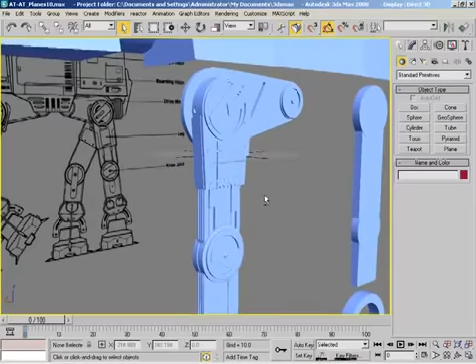So, where are we going to pick up at? Well, there's a couple of things. First off, I'm going to move this little slot that we carved in here. I got a message from one of our users who told me that this is actually a slot to help this little piece of armor move properly, and I was like, okay, because it's real easy to move, I can just do that. And that's done.

Next thing, I wanted to work on the Transdrive, I think that's what we've been calling it repeatedly over these videos, and that's this funny flashlight-shaped thing that's up in between the legs that kind of keeps the legs moving. The legs are actually attached to this thing.

Let's see if I can find it. We'll dig through and take a look at a few pictures. This model doesn't show us too much, but you can see that it's there, all the time. But you'll find as you dig through at least the reference imagery that we have, that we don't have a ton of information as to what this looks like. So some of it we're just going to be making up.

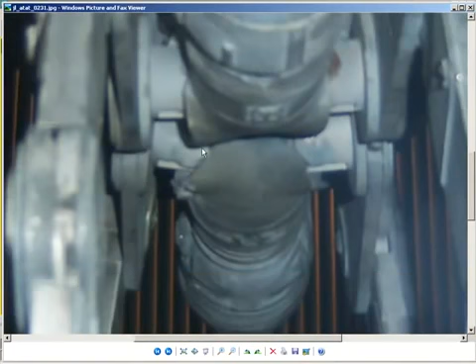So, okay, here's the actual studio model, and this is a pretty good shot, but we're looking kind of down the thing. So it's two separate pieces, kind of T-shaped, cylinder, yeah, T-shaped. Okay, and the T's that come out attached to those plates you made. Yeah, and the funny thing here is we get almost the only piece on the whole thing that's kind of organically shaped, because we got this nice flowy T curve that's all rounded here and rounded there. And that's where I'm going to start, and we'll work forward and we'll work back from there.

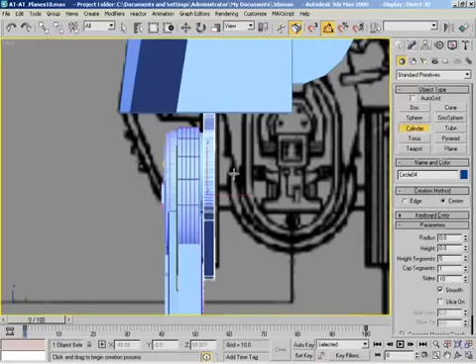So let's begin, I'm going to create a cylinder. Let's see, what are my views? Here's the front view, front view is good. Or maybe I want a real front view, which is actually the back view, don't ask. So let's go ahead and just create a little cylinder.

The size is, I'm not actually going to use the size of my image plane at all, for a couple of reasons. One, if we go to the outer edge of the drawing, you'll notice we have almost no room in between there and our plate, and if we take a look at pictures, there's a little bit of room there. So I'll be kind of fudging that around a little bit. But the other thing, let me get out of here and we'll pull back on the radius from here, is that I'm going to start working at the back and work my way forward. And this little piece, if we come back here, you can just kind of tell is going to have to be a little smaller. The whole thing kind of tapers down as it works its way to this little T-junction.

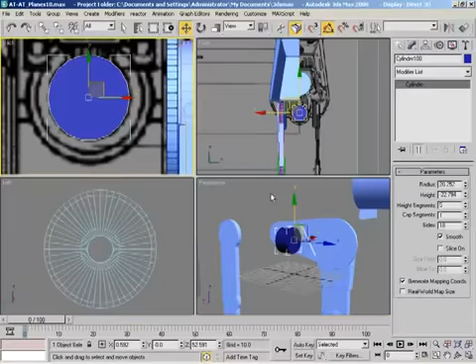So that's where we will begin. Let's jump back over here to perspective. Now, this is something that needs to be rounded and smooth and very organic. And whenever you're modeling something like that, try to keep things as simple as you possibly can.

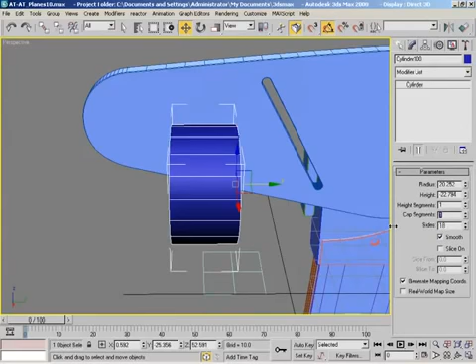So let's hit F4 so we can see edges. I'm going to right-click and kill our height segments. Let's take our sides, I'm going to set this to, not 18, I just want to set it to 8. Oh, your number lock is off. I love that. Okay, now let's convert this over to an editable poly.

And I'll just grab, I want something, it doesn't really matter which one I get. Let's get vertices. And I'm going to rotate this so that I get a flat top on the top and a flat side. Okay, and on an 8-sided object, that means rotating it down its central axis, in this case Y.

Let's go ahead and get the rotate tool out. By 22.5 degrees, which is 360 divided by 2 divided by 8. And that's how you end up with that. So that's not like a magic number, you can actually do math and figure that out.

I know, scary. So let's pull these guys back just a little bit. We're going to end up turbo smoothing this, obviously. So here's what we're going to do for starters: I'm going to create a bend in this that just goes off to the right. Now, to do this, I'm going to get a little fancy.

Of course, you could extrude along a spline. I just don't want to have to build a spline. Maybe I'm lazy, I don't know. I'm going to grab this guy. Notice I deleted a polygon here.

We'll shift drag this out, and then I'm going to shift drag it out again. We'll hit 4 to go to polygons. I'm going to delete out this little bridging polygon. Let's go to edges, and I'll pull this guy in real nice and tight. Just maybe some right in there.

I'm a little picky. Now, let's hit 3 to grab borders, and we'll cap this back. All I wanted to do was create a little floating polygon there. Let's hit 4, grab this face.

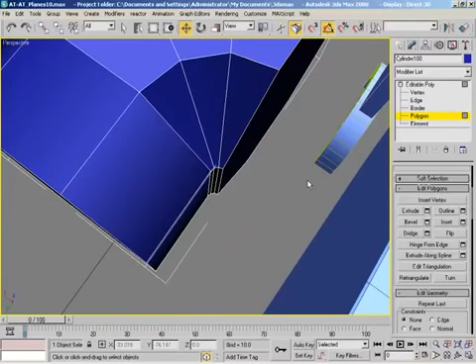So there we go, we're rotating off to the side. We can now hit 4, grab this polygon and remove it, we don't need it anymore. Let's do a couple other things too. Let's grab this polygon, I'm just going to shorten this whole thing up just a little more than it was.

I'm going to extrude. So where's my extrude? There it is. So a little bit of extrude, and this is just to kind of stabilize our smoothing so it doesn't get overly smooth right there. And let's extrude out here just a little bit as well. We got other operations we'll be performing on that in due time.

But let's start off by taking a look at what this will look like when turbo smoothed. Bink. And I like looking at just ISO lines. It's, of course, nicer. And let's go ahead and kick up the number of iterations, and I'll hit F4. So there we go, it's twisting off to the side, but of course we need this to T.

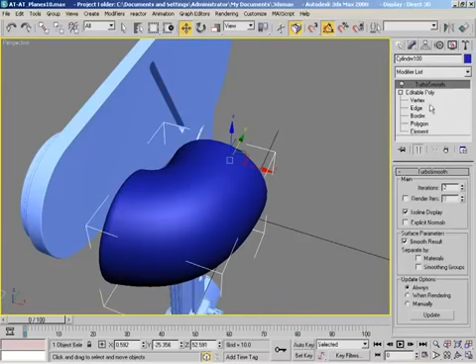It needs to go in both directions. So let's go down to the editable poly level, and in between the editable poly and the turbo smooth, we'll drop on a symmetry. There we go. Now that already gives us a shape very similar to what it is we're looking for.

But I have a personal problem with it, in that we get this kind of flattening right up here on top. And that's not like a major thing, you could probably just completely overlook it if you wanted to. I don't think it would be the end of the world. But if you wanted to kill it, it's not that hard.

What I would do is go right after the symmetry, and let's drop on an edit poly modifier. And we'll come over to edges. Let me press F4 so that we can see edges again. And let's turn off the turbo smooth temporarily.

I'm going to get this edge. Let's just go ahead and loop it, make my life a little easier, and then we'll deselect what we don't want. We don't really need to delete those because we can leave those as two 5-sided faces, we don't need to delete that. You could if you really wanted to clean out the crease right there, but we won't. And we'll leave that guy.

So once we have all these selected, let's scroll down here. I'm going to hold down Control and click Remove. Now double check and make sure that got rid of your vertices. And it did. So now let's take a look with the turbo smooth back on.

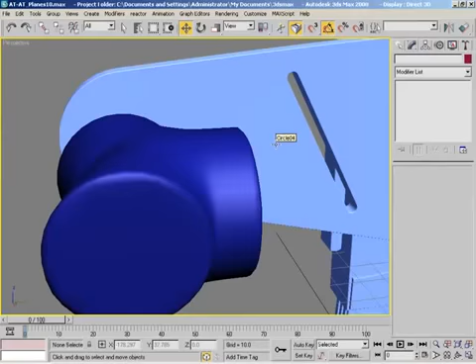And of course, your rounding back. Yeah, get there. And so now everything is all nice and rounded out, nice. And it tees off in both directions. So that's awesome, because now we can just model on one side, and everything will just kind of come along for the ride.

Okay, so we don't have a ton of information here, but we can see that this is going to extrude out. There's going to be like a cylinder that fits into plate. Slot A goes into slot B, and so on.

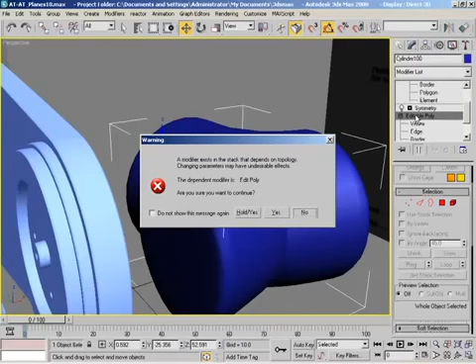So what I'm going to do is make some room first off. Let's do all this at the edit poly level. If we go down to the editable poly, we'll get this warning, and we really don't want to change our topology at this level because we can cause problems. So let's just click no, and we can do anything we want here at edit poly - except for the symmetry, huh?

All right, hang on. Let's just go ahead and throw this away. We'll do him in a minute, we'll redo that one. So we'll toss that, at least you see which direction we're going. So now let's go down to the editable poly, and let's go to polygons. That's what I get from making all this stuff up as I go. And let's inset this - maybe just a little more.

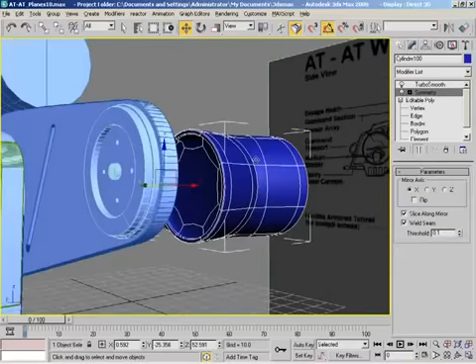That's okay, wait a minute. Hang on, is that creased right there and nowhere else? Yeah, you didn't see what happened? It didn't select the loop in there. That's fantastic, I'll just hit undo, and then we'll go back in there and fix that. No, I didn't notice at all.

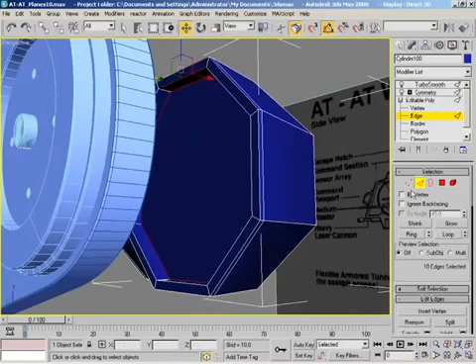So let's hit 4, and then hold down Control, and click on edges. So we'll start with that. I'll press F4 so we can verify. Now we'll click U, then Loop, and that should give everything I want. So yay, now we'll chamfer, and that's fine. So now if we take a look at our end result, that's what we should have, and that's much nicer. And we get that on both sides, so that's excellent.

I wouldn't mind tightening this up a little bit. Of course, we could just cram this into the next shape, so it doesn't matter that much, but maybe just because I'm pickier than I need to be. Let's grab this edge and...

While we're here, actually working on a vehicle for UT3 - I've got to say, I'm very excited about how well the new contest is going. Are you shameless plugging again? No, not at all, I'm just saying I really am excited. It's going very well. Yeah, it is. We've got about 120 entries now, so it's really cool to see so many people still interested in learning the technology. Not that I have a problem with us focusing on just working with studios, but I think it's great working with individuals out there that are hobbyists or interested in getting into this field in the future. Soon to be studio artists. That's right, and I personally love working with them. So it's awesome to see so many people out there still interested in learning the technology.

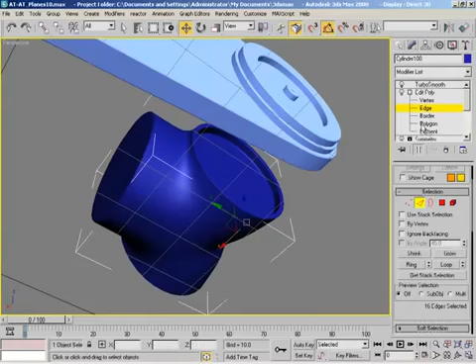Okay, I think I'm ready to re-input that edit poly. I think we've gone as far as I need to there. Okay, so let's go to edges, and I'm going to turn off that turbo smooth, and press F4, because I can't tell what's going on unless I do that.

All sorts of stuff that I don't want to select here. Let's just start simple - loop.

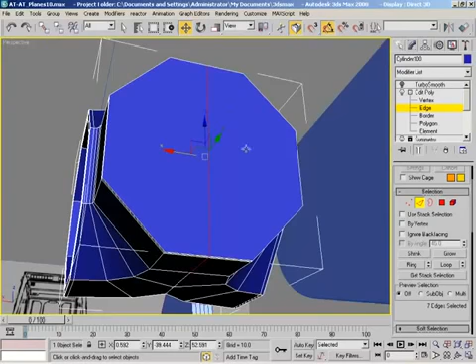So while you are deselecting things at the moment, I'll say that we've got some new stuff coming at 3D Buzz that I think a lot of people are going to enjoy. Don't tell them about that. No, I'm not, I'm just going to say I don't think they're going to be seeing it for probably 2 weeks, but I think it's going to be some cool stuff. 2 weeks? At least I'm looking forward to it. But what happens to those people who watch this in 2 weeks? What happens to them? Well, then they just say, duh.

Okay, gotcha. All right, let's check out vertices. I don't think I have any floaters left. Oh, I missed one.

Okay, double check for float. Oh, look at that. I held down control, but I guess it just didn't want to register on that one edge. And one up here too. Backspace. All right, now everybody should be happy.

Let's turn on Turbo Smooth. Make sure we're up here. Hit the mighty button. And I think we're set.

Okay, so now that we have all of that, and we're golden and ready to rock, you could, if you really wanted to, continue this shape by extruding out of here. I don't want to do that, just because I think it's going to lead to a much higher poly count than I really need. And then smoothing comes with its own rules and problems and considerations. So I'm just going to create an all-new cylinder right here.

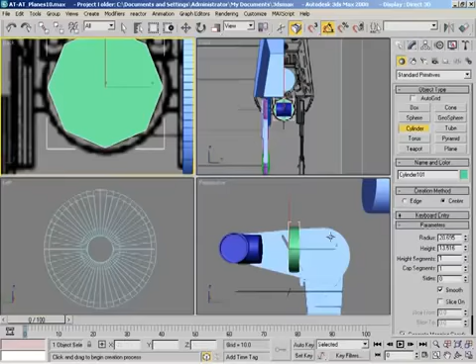That's the perfect cylinder too for our high-res model. What do you say? That'll work. No nickeling there, nope, none whatsoever. Okay, so let's kind of fix that insane amount of nickeling. I don't know what draws me to big round numbers like 32 and whatnot, but we'll go with it anyway.

That would just about work, but it's right at the fringe. Let's kick that up to 42. Let's see what I get. That could probably work. Yeah, I think that'll be okay.

All right, now just looking around at things, at pictures and references and stuff like that, when looking from the side, you don't really see this thing sticking out in the front. And you see it sticking out in the back. There it is back there. And this is also verified over in our image plane set.

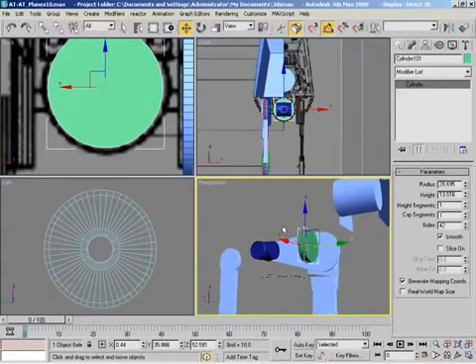If we take a look at the left image plane, I was wondering where we were there for a minute. I noticed, you were actually confusing me as the mouse continued to go round and round the screen. Yeah, I didn't know where I was going there for a minute, but don't tell anybody.

So we're going to leave this kind of back behind our great big plate here. Also, as I mentioned a second ago, what we don't want to have happen is to make it so big that we don't have any room to put some little extrudy blocks or some sort of greebling that goes here on the side. So we're going to be pulling things in a little bit closer than what is suggested over in the image plane. Let's right-click on X to center that up.

In fact, if we really wanted to, we could probably go ahead and align it just to be on the safe side. Align it to this guy, and we don't need, was it Z position? No, I'm thinking Maya, so we don't need Y. Let's click OK.

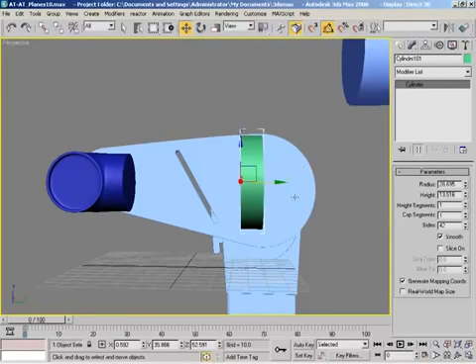That lovely jumping back and forth between two different applications, Z up worlds, and with Z up and Y up, that's always fun. Okay, so let me increase the height here, and then I think that puts us in a good position to go ahead and start modeling from here.

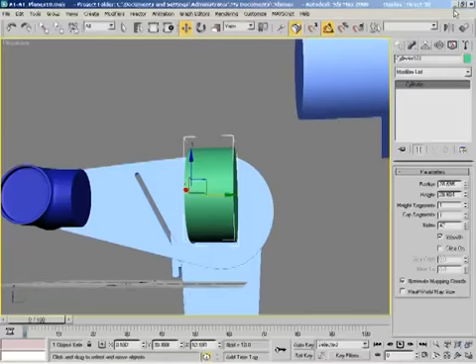Now what I'm going to do is just create the very basic outline of the shape, and we'll worry about the details and the little ridges that are inserted in a moment. So let's go ahead and get this guy converted over to an editable poly, and press 4.

Now, what I'm seeing generally, and again you have very limited information, is we have a very thick band. And if you're actually kind of modeling this in your head, you'd inset and then extrude out to another level of detail, then inset and go out to another level of detail that might have just a little bit of tapering on it, maybe not, it's kind of hard to tell, and that's going to plug into our little T thing. So I'm detecting kind of like 3 tiers of detail as we go from here down to there. Okay, so that's what I'm going to go by anyway.

So let's do an inset, and I don't know, I have this affinity for using the spinners. Click OK, and extrude, give that a little bit of room. Do something like so, and click OK. And then let's go ahead and inset again. Maybe not so much, I'm probably going to have to make some edits here, but we'll deal with that in a minute. Then let's click OK, and then we'll extrude again. Ta-da, sorta.

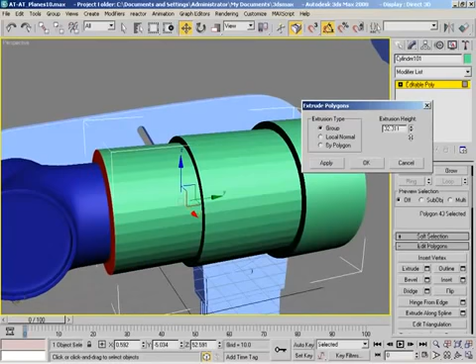Okay, so really basic so far. The first thing I'm going to do, and this is just a mental thing on my end, not everybody's going to be this way, but the normaling, the smoothing group stuff, gets on my nerves when I'm trying to do something like this. So let me go ahead and auto-smooth this whole thing and just make it look round again.

Okay, now back over to here. So we've got some funny little extrusions. Anything like this guy here and this guy here, I wouldn't extrude those out of the shape. There's no reason you couldn't, but just to keep things easy on myself, I would just put those in as separate objects, like a little block in there.

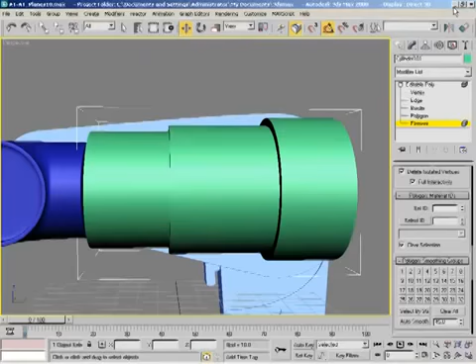I can't tell if we have little rings around there or not. I really don't know. I'm really two shades shy of just making the whole thing up and not worrying about anything. I thought that thing moved over a second ago. Yeah, okay, so it wasn't...

That's weird, and this thing is not centered either. Hang on, where's your pivot? Why are you off to the side? What's going on here? Is his pivot moved somehow? We must have moved it at the sub-object level. Yep, I think right there. There we go. I must have, when I had the element selected... I thought you bumped it. Yeah, I hate it when that happens.

Alright, well let's come down here and just do that again. Auto smooth. Okay, so here, let's just make some stuff up. Now, some of the stuff is fairly obvious, so let's begin with the obvious things.

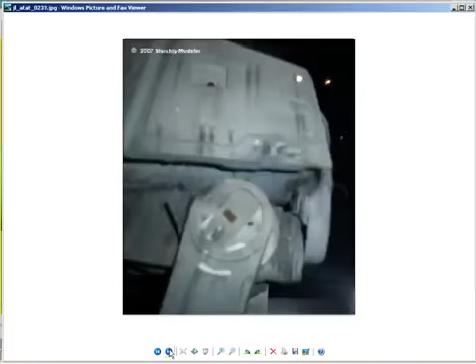Like what's going on up here? Because there's all sorts of reference pictures that kind of show that big, rounded, spherical thing that sticks out of the front there. You could see it there if it was lit just a little better. Let's dig through our pictures though. Digging, digging, digging. Oh, that's kind of a good one. So, okay, funny little capsuloid thing.

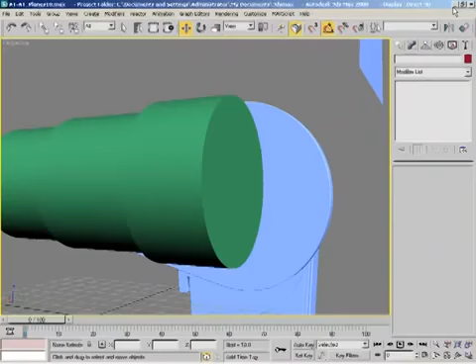We extrude back in. So let's just have fun with that first, because that's easy. Small victories and stuff. So we'll do an inset, and it looks like it's kind of a thin wall. So we'll go to about there. Now I'm going to extrude this in. Did you see what I just tried to do? Tried to treat it like a spinner. I was hoping you didn't see what I was trying to do, but apparently you did, so that's okay.

Let's click OK there, and I won't worry about the smoothing groups yet, but they are already getting on my nerves. Okay, now the next thing. Let's jump, I think I have some more detailed pictures. Actually, the picture of the studio model is probably not half bad for this, but I just wanted to dig through anyways, kind of refresh my brain. This one's not bad. So, I mean, almost kind of spherical and sort of not.

Get something close. And again, we're kind of making some of this up too. I don't think this is like a super critical piece. I think as soon as even your Star Wars buffs see the T piece there on the bottom and the cylindrical thing up between the four legs, I think this is going to work out great. Ooh, that's not bad. Oh, that's actually a really good shot.

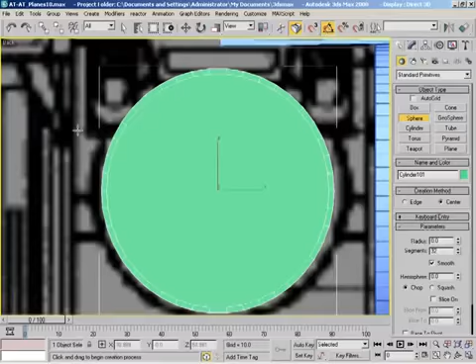That's actually really good. So, okay, I see a sphere there. And I don't want to make a sphere by hand because I'm no good at that sort of thing. So let's make a sphere, and we'll go into the so-called front view to do it, but not really. It's so-called back view, but it's really a front view. That's our little secret though. We'll pull this out so it's about as big in radius as our cylinder, which we can't see very well.

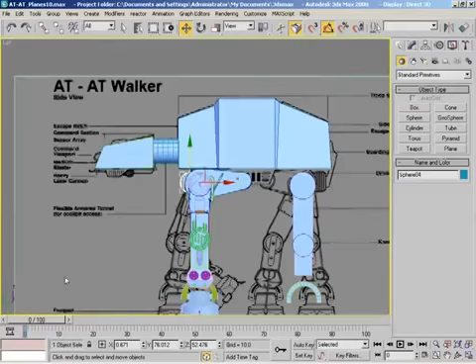It would be nice if we could increase the detail in both separate dimensions like you can in other 3D apps I could mention. But, you think I'm being too picky? All right, let's just try this. It's all going to end up becoming part of a normal map anyway.

So now let's convert this over to an editable poly, and hit 4. Now we can cut this in half, but I would almost go one extra step, because I don't think we really need these ones that are almost horizontal. So we'll go ahead and nuke all these out. Now let's get out of sub-object mode.

Now let's align this. Click, click. That should be good. And we'll slide this back in here.

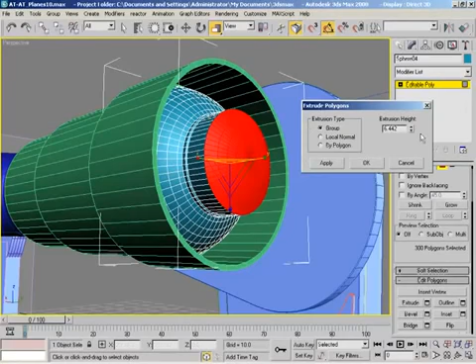Now, does that actually come out past the ridge? Does it look like it does? It does to me — no, yeah, I don't think it does. It doesn't look like it, and it looks like I've pulled it out a little far, at least from that perspective. We're looking straight down the thing so it's hard to say, but maybe only right to about here. It's one of those details where I don't think it's going to break the model if it's a little off. No, I don't think so. I think it'll be fine.

The other thing too, I was just wondering about maybe grabbing the whole element. Oh, you still have edge constraints on, which was cool — that did like a weird melty bevel-y sort of effect. I need to remember that one.

Just kind of flatten it out a little, because I don't think it's a perfect sphere in there — just a little bit of flattening. Notice I'm scaling at the sub-object level, just in case I do anything weird like parent this or parent something to it. Okay, and then that's tucking away inside very nicely now.

Hit F4 and have a quick look. Nothing really scaring me about the normals or anything.

Let's go ahead and bring up the material editor and let's say you, and you, and you — did I miss somebody? Oh, it doesn't want to select them. Okay, there we go, yay.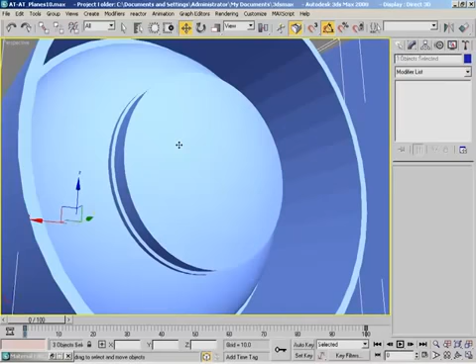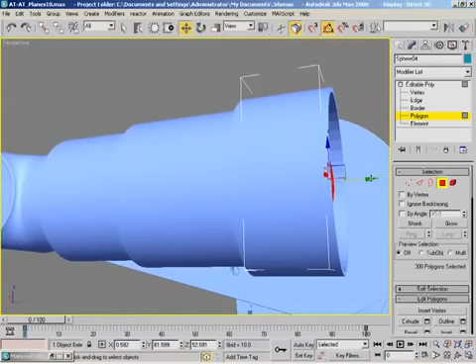Can you quickly gain access to those polys inside? Maybe pull that out just a little bit more. You mean in here — let me get out of here. Yeah, you want... well, not those polys, but that's okay, we can do some of this action. Actually, that was enough right there. Let's see if I can just take those out, and then we can grow that a couple times, and pull that out just a little bit. I think it's just... yeah, it's a little better. Cool, something kind of like that.

And then while we're here, we can hit auto smooth. Maybe a little bit of beveling for old time's sake — that one and this one, and of course, loop those. Chamfer.

Click OK. All right, now there is some detailing on that piece — you know, a funny little circle thing with a circular extrusion and some funny sticks in there. I'm not going to worry about that right now. We'll do some detailing sort of things here in just a moment. Let's move our way outward — I'll handle all the detailing at once.

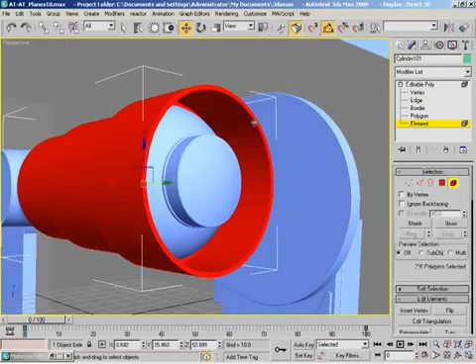To jump back a topic, I'm really excited to see all the entries we've got in the old school level design contest. Some really good work coming out of there, too. I've seen some very impressive maps.

If you're watching these videos, I'd like to think you're either interested in or involved in Unreal technology in some way. If not, you probably should be, especially if you're interested in getting into the gaming industry. Not because of Epic, but because it's cool, with over 100 licenses for Unreal Engine 3 technology out there. Getting involved with Unreal doesn't necessarily mean trying to get a job with Epic Games, since there are a lot of companies out there that license their technology.

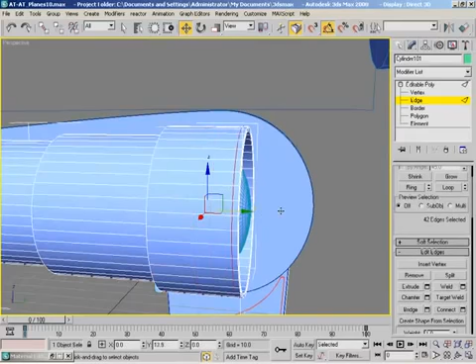All right, now I am just putting in some ridges here, having some fun, almost generically. So let's chamfer this guy. Let's chamfer this way, I like it better. And that'll be one. Now let's grab you again.

And ring, and let's see, let's do a connect, and this time we'll do... that's too many, maybe just two. I don't know, like I said, I'm very much just kind of making this up as I go.

Alright, let's chamfer these guys and make them just a little smaller. I wouldn't mind making that guy up front just a little bigger. So let's grab you and loop, we'll slide that back a little bit.

I always love that about it, it's a 3ds Max thing. That first move you make is a big jump, and then you've got to kind of slide back into place. Those of you who've been using Max for a while know exactly what I'm talking about.

All right, click, I want you. No, I want... come on, you. Here, I got to do a smooth zoom. So I need that guy, and I need... come here, no, there you go. And then I need that one. Okay, excellent, now we need to ring all of those, and hold down Control, and click on that.

Now let's extrude, that's fantastic, we should leave it just like that. Wow, it's cool how it's going off in 3 different directions, too. All right, let's go by local normal, and just pull those in a little bit, we don't need them to go very far.

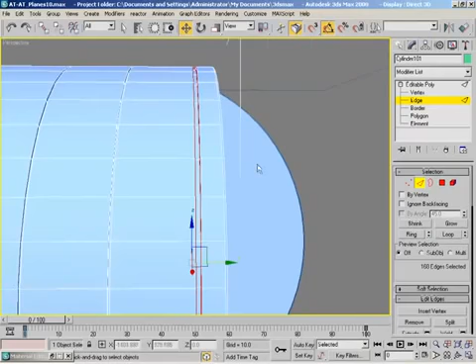And then I'm going to push y'all forward just a little bit. Y'all, I said y'all on video. You sure did say y'all. I did, and you just got to deal with that. And it's funny too, because that was like a real one where I was just trying to say you all very quickly, and it just, there you go. All right.

Slide that back, I'll reposition this guy in a moment. Now let's get this guy and this guy, and let's ring them. And really, that would be enough on anybody's budget.

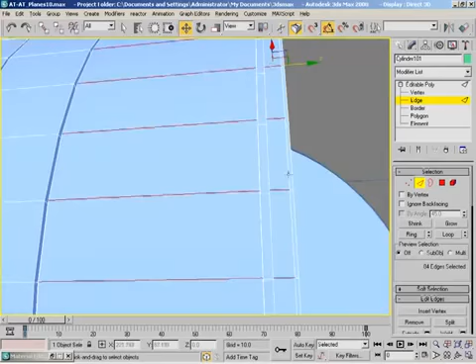Ooh, but yeah, it comes with responsibility. Let's grab this guy, too. Did you want to bring out that? Maybe not these guys, is that what you're saying? Yeah, I'm thinking just maybe the thick band behind it.

Get you, and then ring. Well, we can do that. Okay, so let's scale, and of course we got to put our little scale tool here in the middle of everything, and pull this out just a little bit.

Was that something like you were talking about? Something like that - thicken the whole thing up, and then just do some chamfers here to clean that up a little bit. Then loop, and chamfer, maybe just a little more, just for the fun of it.

Now it's really a question of whether you'd want one more ridge here. I'd do two more, maybe leave this one right where it is. I'd also push it back a little bit, just a little bit more. I like that paint selection tool. No, I'd push the back further. Don't worry, a little bit more, a little bit more. Yeah, I'm happy - well, that's what's important.

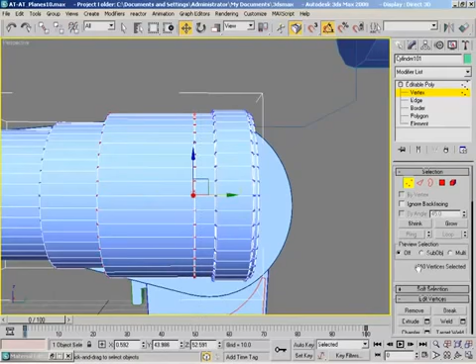Now let's see here - I'd like all these to be evenly spaced, so I'll put in at least two. Here's what I'm going to do. Wait, hang on - I don't want you to do that, because you see it dented in. Oh yeah, I don't want that.

All right, cancel that out. I'll just eyeball it - throw in two more, space them out. I was going to be all precise and stuff, which you could do. If you put in two more, that's breaking it into a total of four, so we could call that roughly about a fourth. Then 1, 2, because there'd be 4 fat segments.

All right, so let's go back here to edges, get the ring, and come down to connect. That was pretty close, yeah, pretty darn close - close enough. All right, where's my chamfer? It's somewhere around here, and I think I made that a little bigger than it was a second ago. We'll just eyeball it again, get it close, click OK.

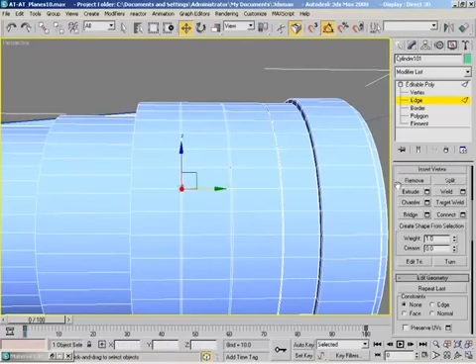Get your friend over here - nope, wrong friend, wrong friend again. There we go, you got to zoom in real close. Okay, so ring, control, jump over to polygons, and extrude, local normal. That all should be good. Ta-da. I'm not even going to worry about beveling or chamfering those little edges in there - I don't see a point.

All right, let's hit F4 real quick. We won't be able to see much unless we go to an angle, which is okay. All right, now next, transition - this is where we can start having a little bit of fun. I'm going to actually jump around a little bit. Let's come over here to this guy - here's our edit poly.

Any extra modeling we want to do that would add or remove edges we'd want to do here, but I'm not trying to add or remove edges. So I'm going to come in here to vertices - and yes, that's absolutely fantastic. Let's get these vertices and scale them up.

Ooh wow, did you see that thing explode? That's not what I want. It doesn't like that - or maybe it's just not updating properly. No, it really doesn't like that.

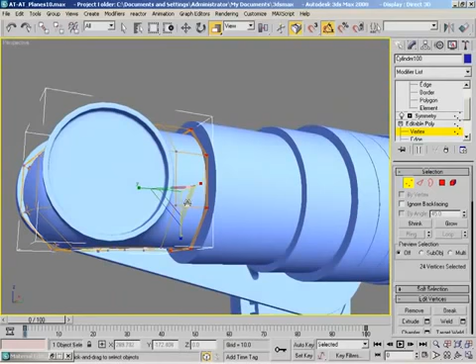What's the deal there? All right, hang on - maybe I should just be scaling in this direction. I didn't like that either. That's kind of weird, because it's not doing that anywhere else, and you'll notice it's not consistent either. Okay, we must be changing something we shouldn't be changing - that's probably Max's way of saying hey, don't do this.

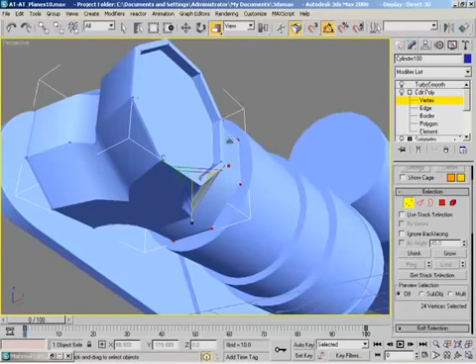Yeah, and that comes in here, vertex, and then turbosmooth - wait a minute, turn that off. I just want these vertices. There you go, all right. Hopefully this doesn't break anything. No, it doesn't, and I don't want too much - I just wanted to kind of widen it up a little bit. That's all I wanted to do.

All right, get out of there. All right, that seems to be functioning - that's all I was worried about. Now that we've got this pulled back, I think we stepped in a little too far, but it's almost hard to say because we got so small over here. It's almost like you'd want to take the whole thing and scale it up a little bit, but I'm not convinced I really need to do that just yet.

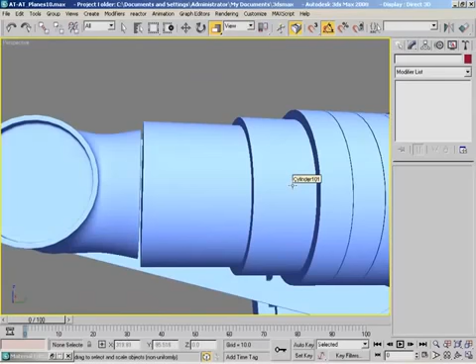I'm thinking - it's always frightening when I've got to stop and do that. Well, while you're thinking, I'll just remind those watching this video that pretty much everything they see is you doing on-the-fly modeling.

Let's see here - I'm going to thicken this guy back up a little bit. So let me go to ring, and I'm just going to push this guy out a little.

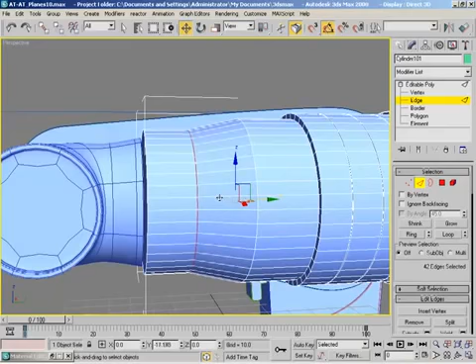We could loop this. I had thought about turning this into more of a taper effect by running it through there. I think that'll actually look a little nicer than what we've got - at least a little more techy, so it's not like a stair step down.

Okay, let's jump back over here. I'm going to loop this because I'm at least halfway making this piece up, since we don't have a ton of reference for this. All right, but I dig this.

So I'd like some ridges that actually come out instead of in. Let's ring and connect. How many ridges did you want in total? Let's do 3, but I don't want them evenly spaced - I'll move them around here in just a minute.

So we'll start with this guy. Loop, slide up a little bit, and chamfer and get wider. Then we'll jump over to - there we go. Click OK first before you get all overzealous and start working before your operation's done.

And ring, control click there, and extrude. I don't want to go in, I actually want to go out on this one - something kind of like so.

Click OK. Next friend, so you. Loop, slide, get him kind of close. We're going to chamfer him too, but not as wide, so he'll be kind of thin.

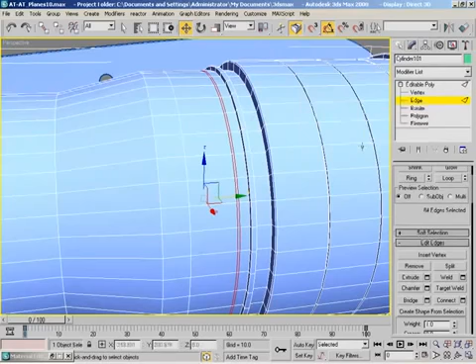Maybe something like that. We've got to zoom in, I know, because sure selecting that will be kind of funny. Ring, control click, extrude.

And I almost wouldn't mind something very similar for the next piece. That was awesome. Did you like that? Loop.

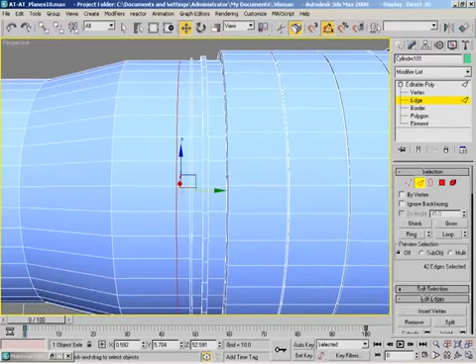I don't know, not quite evenly spaced - these two will be closer, I've decided for some reason. We'll chamfer that, click OK. And then ring.

And where did I leave off? Oh yeah, control click it. I don't remember anything, extrude it - totally lost track of the world. All right, so there we go.

So let's do a couple of quick chamfers on these to make them look a little prettier. We'll do these separately, so let's loop, chamfer - that'll probably work. And then you two, loop, chamfer. You see, that's a little heavy for those guys though, so we'll pull these down, click OK, hit F4, back up and take a look at our handiwork.

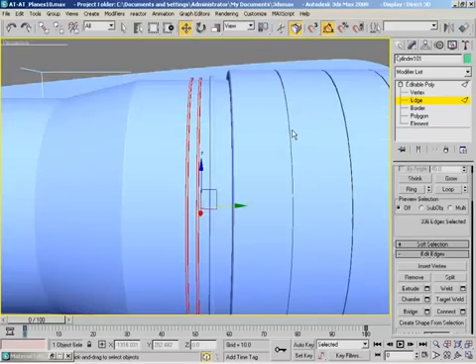There's something about that that actually makes me feel like I should go back and chamfer the edges of these guys. Maybe it doesn't matter - maybe in the texture it won't make any difference, maybe just leave them sharp for now. You see what I'm saying though? Because you don't get any highlight over here, but it probably won't matter come texture time and whatnot.

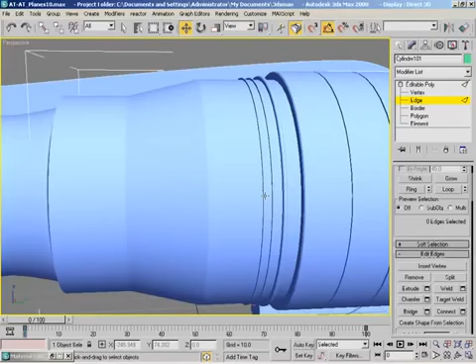Okay, so I'll talk myself out of that. What do you say? We could try to keep things kind of lively and interesting, you know, not too much. I don't want people to get too excited and think that modeling is actually fun. Excuse me. Oh, it's all good, man.

Okay, it probably won't let me loop this. No, of course not - that'd be too useful.

All right, and we could probably get away with just a little more tapering here to get us more cleanly to that piece. In fact, I'm sure we could go ahead and use this guy and start creating some sort of a join there.

Now, I don't know if it's even going to let me do this, but I thought I'd try. No, okay, I'm thinking of another application - it's not Maya this time.

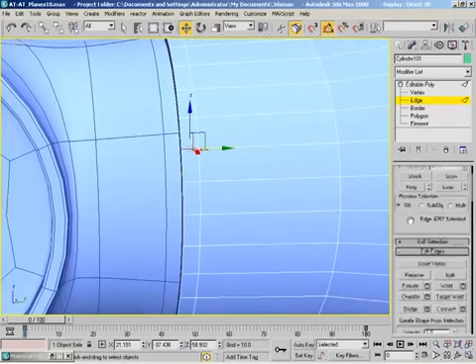Let's grab you and ring and connect, just want one, and slide over here, click OK. You, ring, control click, extrude. Actually, that doesn't look bad.

Okay, I'm going to do a couple more things. More kind of on-the-fly command decisions, because those are my favorite kind.

Stretch this back a little bit. It almost straightens that out, doesn't it? You could probably almost remove that, but I'm a little afraid to.

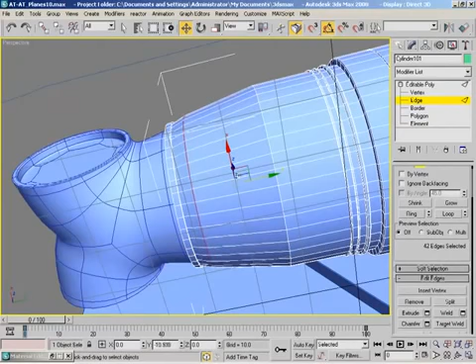I'll just hold on to it for now. Let's see here, we're going to end up, according to our picture, there's some that we need like room for some little, whatever that is.

Access hatchway for repairs and stuff. So let's go ahead and make something in here that we could fit that in on. I'm going to fit that in between two of these kind of ridges. So let me grab you and ring and connect once. Actually, that's not bad, chamfer that with a little more chamfer.

Click OK, ring, control click over here on polygons. Man, things got really quiet. Did you pick up on that? It's me too, because I'm sitting here talking to myself and modeling.

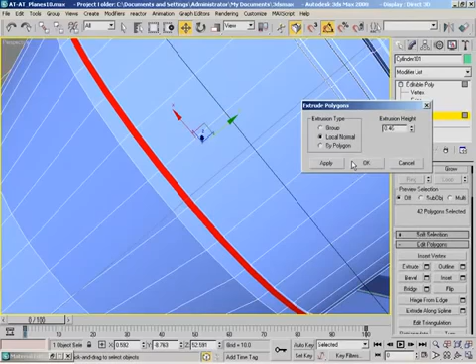Just following along. Are you modeling too? Yep. Sweet.

Okay, and then later on, once we get to the detailing phase where I'm adding little bits and pieces, we can stick something in there. Gotcha. Okay, let's see here.

Let me just back away from everything, because I'll end up staring at it for too long, and I'll never leave it alone.

We could probably, aside from maybe, I don't know, this area feels like it needs some attention. We'll put like maybe a couple of indentions in here, but overall I think we're getting to an area where we could just step back and start putting in some detail stuff.

Okay, so let me hit F4. Again, I'm just kind of sort of making stuff up, so let's connect that twice with no slide, a little bit of overextended pinch. Click OK, chamfer, we'll boost that. Click OK again.

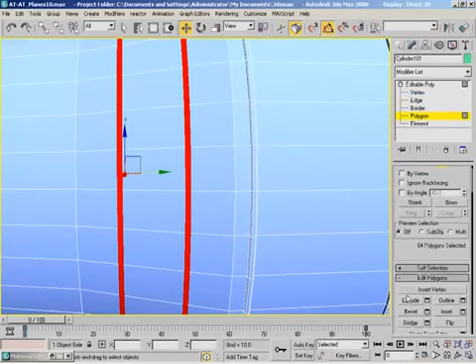You and you, ring, control click polygons. Extrude, and this time we'll go inward. There's going to be a kind of an angle because the face is, but I don't think that matters much.

And these, just for the fun of it, just because we're here and I was thinking about it, I will go ahead and chamfer out. It'll give them a different kind of look. Loop, chamfer, and pull that back.

F4. Oh yeah, that's much cooler. I keep looking at this band that we made, and I just keep, like, in my head, wanting to make it bigger and bigger, keep sliding it back. Nah, I know, I gotta stop.

Okay, let's do a little bit of detailing work. How much time do we have left? Because I've lost track now. It's really up to you, I'm letting it run a little bit later. So are we already kind of to our limit? Yeah, we're to our limit, but if you feel like running a little longer... Yeah, I'll run just a little bit longer.

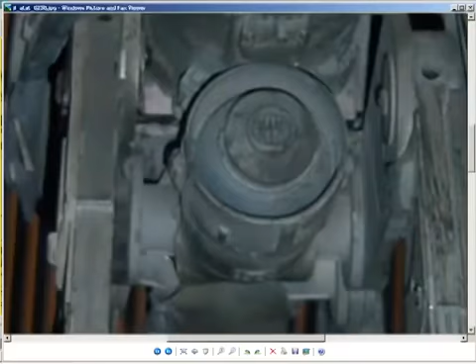This funny piece up here, it's kind of... what's a good word for it? It looks like you could just go in and build the whole thing as a complex spline. Well, I was looking at that, but I had another idea for it.

Here we've got like starburst, like ridges thingies, that are sticking out, and then three straight up and down ones. It's all cross hatched, and I always, even in the real world when I'm looking at stuff, I always try to see how does that relate to geometry. And I'm thinking we could take a cylinder and then triangulate it, like more like the way cylinders are created in Maya, where instead of having one big cap piece, you have some triangular pieces that all meet in the center.

Then extrude the thing, like take half of it, extrude it out, put a division in there, and then just keep that end of it that's elongated like that, delete everything else. And what is it, the lattice modifier? I think that might create that piece.

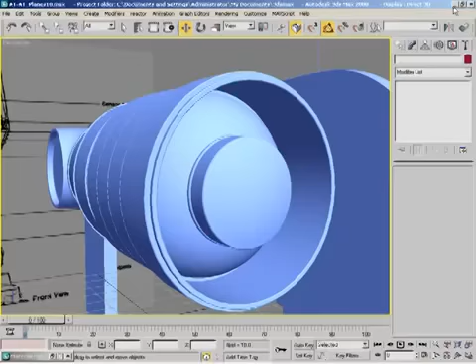Okay, I don't know, but I want to know for sure, so let me test that theory. Let's create a cylinder. I love that front-back view discrepancy thing, it just makes my day.

Let's create a cylinder like so. I don't really care how tall it is, it's going to lose its height eventually anyway. This may not do exactly what I want it to, but that's okay if it doesn't. I'll live, this is just one of those experiments.

Now, coming over here to this thing, sides. Sides is going to be important because if we come over here, we have what, 1, 2, 3, 4, 5, 6, 7. Oh okay, then that's counting all the way around. So 1, 2, 3, so a total of... why did my brain shut off?

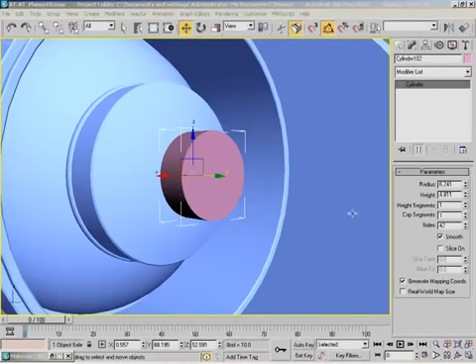That'd be like an 8-sided cylinder. 1, 2, 3, 4, 5, 6. No, it'd be a 12-sided cylinder. You're high, by. Okay, so let's kick that over to 12, I think that's right. So let's see, let's hit F4. 1, 2, 3, 4, 5, 6. Yeah, that's right, okay cool.

Now, let's do some stuff. Let's convert this over to an editable poly.

Let's grab... come back here. I don't know what it just selected, but it's not what I want. There we go. I want just this face for a minute.

We need to tessellate it. There's a button for that somewhere around here. Oh, right there in front of me? Yeah, but we want to do it not to edges, because that runs them out to the edge. We want to do it on face level, and then we get that really nice layout.

So do that, and let's hit Control-I to invert my selection, and we'll hit Delete. So we just have this funny cap of faces. Let's get just these guys for a minute.

I really wish you could Shift-Drag to extrude, that'd be so nice. Let's extrude these. And that's not at all what I wanted to do. But it's kind of a start, really.

By group, by local normal. That's fine. It'll get us started.

In fact, no, try to keep it easy on myself. Let's put that back. I'm trying to think of the way that I would like to do this. I keep going back and forth in my head to Maya for some reason. Don't you hate it when that happens?

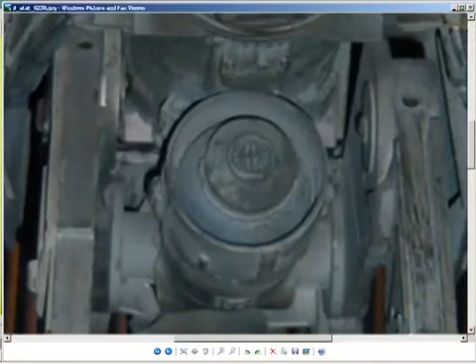Hang on, let me look again. Yeah, I mean, it is kind of turning into a mess right there.

The only thing I would do differently would be, of course, we'd want some sort of a piece out here. I wouldn't want to use this as our final outline. That's just me, I would probably want to make a spline shape that did that for us.

So let's bring down the radius even more. Let's maybe 0.35.

And just so I don't confuse myself too much, go over here, hit M, select you, drop that on. And we could slide this back across there. And then we can actually just adjust the vertices until that lines up.

Let's do this though: Modify, Affect Pivot Only, Center to Object. There we go. Now we can right-click it on X.

In fact, if we wanted to, we could symmetrize the whole thing, so we don't have to do as much work to round it out.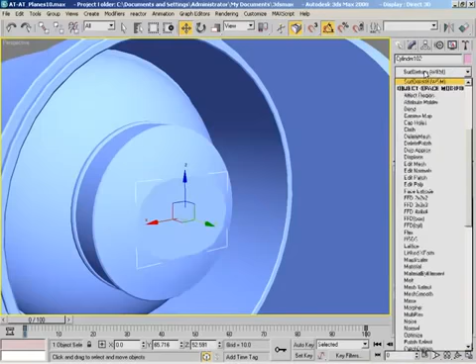Whoa, I wrapped her all the way around. Okay, there we go.

Great, now we can come in here to vertices. Let's show the end result.

Or not. Symmetry and then lattice. Is something not updating? Okay, gotcha.

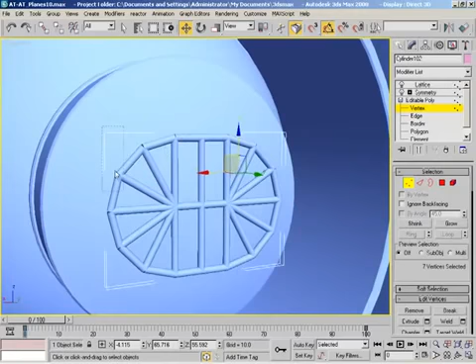I'm sure I'm just missing something vital here. Let's turn that off. Okay, it's working to a certain point. That's fine, I'll get to the details of the rest of it here in just a second.

I think I see what it is. I think I'm just symmetrizing, excuse me, individual vertices, so I don't need to do that just yet.

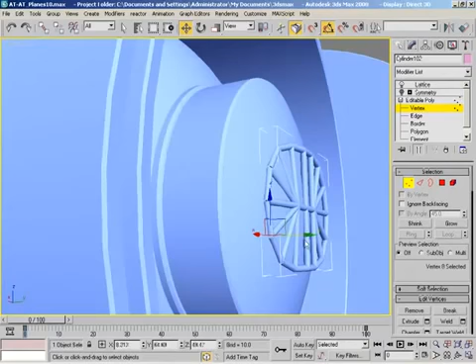Maybe pull this guy back out just a little bit. Yeah, I could have moved the top and bottom at the same time, but what fun is that, really? Okay, so now that we have that, let's jump back up to here and turn symmetry back on.

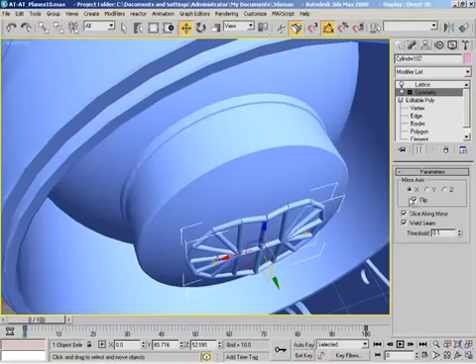No? What do you want to bet it's symmetrizing the wrong way? So yeah, I was working on the wrong side. Whoops.

You can probably just leave it that way. I want to try something else, though, while we're on a roll coming up with funny things to do. Let me grab this guy. Can I loop it? And the answer is yes. Let me turn off end result. Good, that's everybody I want. Edit edges, create shape from selection.

Smooth would be good if you can do that. Click OK. Now that... okay, that's fine. It's a little weird, but that's okay. Let's get out of here. I want that shape.

Editable spline. Can we stick a symmetry modifier on that? Will it work? And the answer is not really, not the way I want it to. That's okay, I'll fix it.

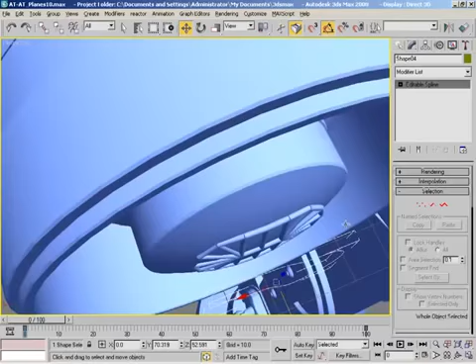Jump in here. Actually, you know what I should do? I'm thinking, hang on, bear with me just a moment. Let's just delete this guy. He was a good idea for a second, but I got a better one.

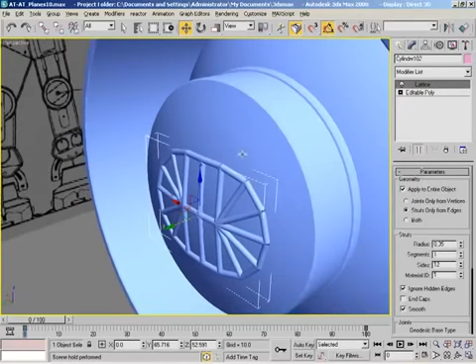Let's come in here to right at this point, and let's Collapse To. Hold and yes, there you go. So that's just the new shape of things. Now we can convert this over to a shape from selection and smooth it, and there we are.

If we just... make sure we have the shape selected. Okay, looking good so far. Now all we need to do is come in here to this spline and turn on Enable In Renderer, enable in viewport, and there we go. We can kick up the thickness of it a little bit if we need it to be a little thicker, fit that over those funny looking segmented pieces.

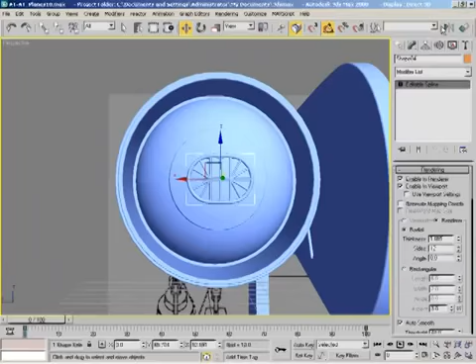And there we go. Now I wonder if the whole thing's a little big, or maybe the whole thing needs to be extruded out a little more. I don't know, do you have any thoughts on the matter? I don't know, it looks like there's another cap.

Go back to the picture real quick. Like that extrudes out, and then this is all fit on top of that? Yeah, it's like there's another cap that's extruded out of the centerpiece. That wouldn't be hard to do.

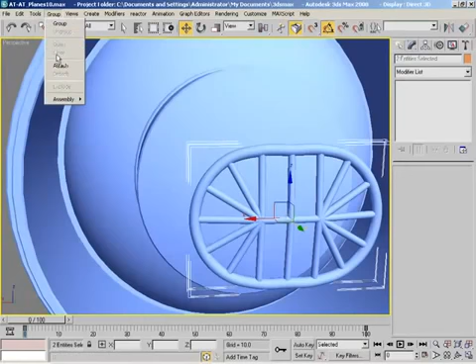Let's get both of these guys and pull them out of the way for now. I think the whole thing could be shrunk down a little bit. Let me just group these guys, and we'll call this Transdrive Deco _1. And we'll just scale them down a little bit.

Okay, now back over here to this guy. F4, F4, so I can see some vertices. Let me grab that paint selection tool because it's easier. Get that, and then grow it about there. Is it one more out, you think? Or do I need to make a new level?

Oh, right there might work. It's not a huge gap. It seems almost like that's too big, and that's too small to me. I don't know, I think the other one might work. Okay, and I see what you're saying in the gap. Absolutely.

There's something about like so. Of course, that sticks out a little bit, which, you know, so ours sticks out. That's okay.

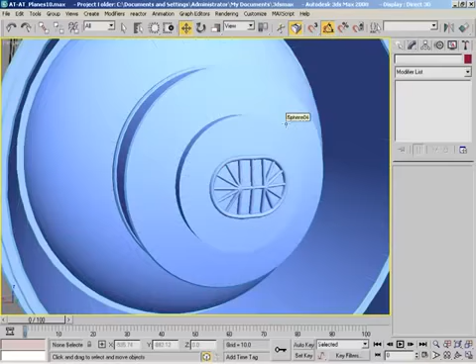I would want to bevel that. And I can't tell what I have selected, so... alright, let's loop that, and chamfer.

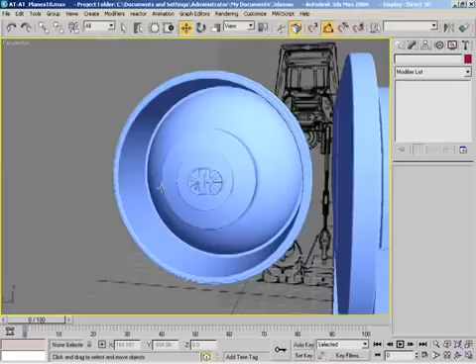It's a start, yeah, it's a start. I might get you to play with that piece off camera. When you first had the symmetry on it, it was basically that piece is twisted a little bit. Is it, right now? Yeah, if you look at it real close. I think on the left-hand side just a little bit.

Well, maybe not as bad as I thought it was. I think it was until I collapsed down to the symmetry. And then it should have been equal on both sides because I didn't mess with these sub-objects at that point. Okay, well, if we're good, then we'll be good. I think it's good, it's our little grill. If it was off, I was just going to have you tweak it off-camera.

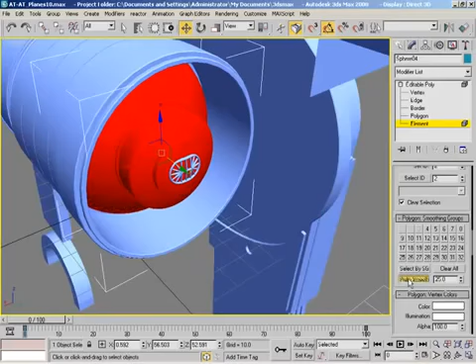Fix it later. Yeah, just since we're pushing pretty far here, let me just go ahead real quick and we'll do a fast auto smooth on that. And that might be too far. Let's pull that down to about, not even that, let's go 25. Auto smooth. Okay, there we go, cool.